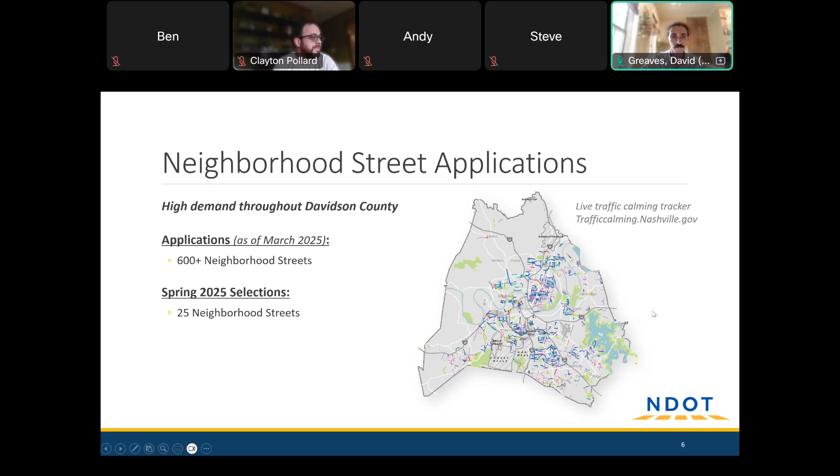So there are a few things that the traffic calming program does as part of these projects, but there are a lot of other things that NDOT can do, or certainly Metro Nashville as a whole. So if we run into anything in this meeting that maybe we're not able to handle with this project, we want to make sure everyone is aware of Hub Nashville as a resource to report all sorts of things.

So it's a good place for sidewalk requests. Maybe some signage is broken or run down. Really anything from a pothole or a clogged storm drain all the way up to a request for a new signal can go through Hub.

Okay, so about the prioritization formula, or how Ben Allen got selected for traffic calming. We basically put together a weighted score based on 5 factors. Those are vehicular speeds, volume, crash history, non-driver accommodations, and trip destinations. Now you'll notice that vehicle speeds and volume, which is how many vehicles drove on the street, make up the vast majority of the score.

And the logic behind that is between the amount of cars driving on a road and how fast they're going, that's a pretty good proxy for the risk that is posed to anyone who might be using the street. We also do consider crash history because if there have been any vulnerable road user crashes in the last 10 years, that's a good indicator that there's a problem that should be solved.

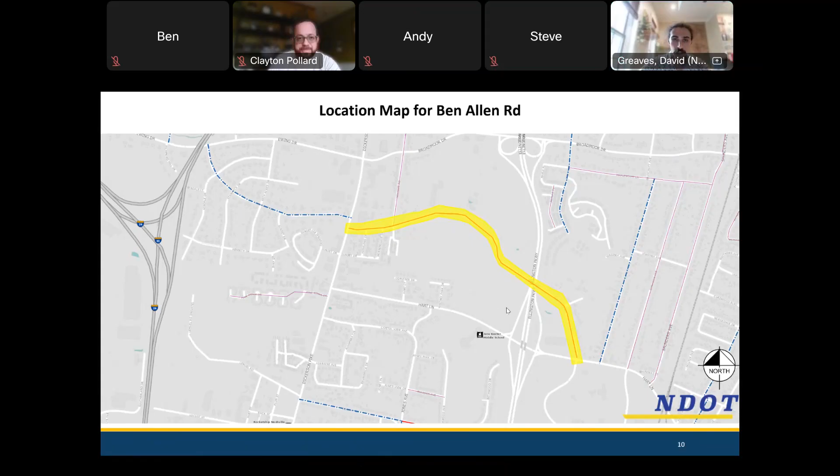All right. So if anyone is familiar with the traffic calming program, they'll know that a pretty good portion of our designs include what's called speed cushions. We use these often because they're an example of that kind of physical measure to pursue slower speeds. So unlike somebody writing tickets or speed limit signage, these actually physically affect a vehicle as they're traveling over them. They work like speed bumps, but they're stretched way out to achieve a higher target speed. So something in between 20 and 25 miles an hour is thought to be the ideal speed that these are designed to produce.

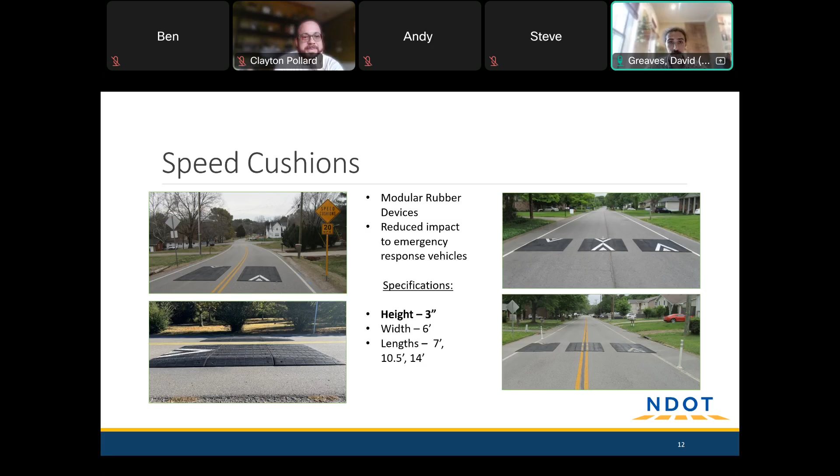And the reason that they have gaps in between them is to provide a reduced impact to emergency response vehicles. They're about 3 inches high, they're 6 feet wide, and they come in a variety of lengths, 7 to 14 feet. Similar to these are speed tables. These are made out of the same materials, just in a different arrangement. And the main difference here is they lack those gaps. So they do not have the same kind of reduced impact to larger fire trucks, ambulances, but they do stretch all the way across the road.

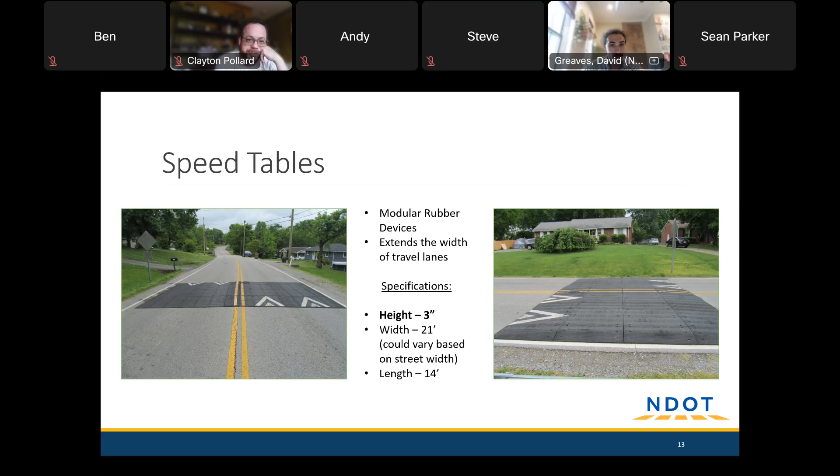We tend not to use these very often. We'll sometimes pull them out in a situation where maybe the width of the street is kind of an odd number, so we can't really fit the right amount of cushions in there, but we do use these somewhat sparingly.

Now, the reason that we use these so often in the traffic calming program is because they've been demonstrated to work pretty well. So what we're looking at here are the results of a study conducted in March of 2023, where 6 projects were measured and observed. And before those projects, the average speed on the streets was 31 miles an hour, and afterwards it was 22. And then the 85th percentile speed that we mentioned earlier came down all the way from 37 miles an hour

to 25. So the hope would be on a street like Ben Allen, if we were to install vertical measures, we would see a similar degree of lowering, taking that 85th percentile speed down from 40 to somewhere much closer to the speed limit and a safe speed to share the road with pedestrians and cyclists, really whoever is there.

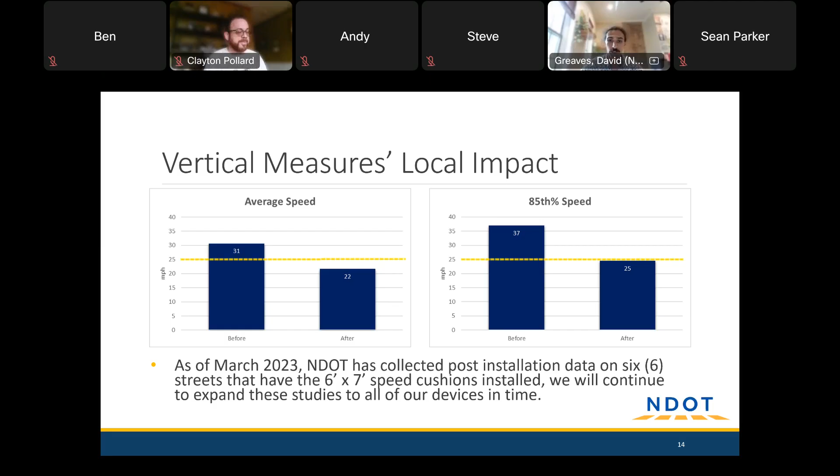There are plenty of places and reasons why vertical measures may not work in a particular place or on a particular street. Maybe a hill is too steep for vertical measures to work well, or we don't put them on blind curves because we never want to surprise anyone with a speed cushion. In those circumstances, we'll sometimes use radar feedback signs to fill in the gaps where cushion spacing isn't quite as ideal as we'd like. These do have some impact. On their own it's not a whole lot, but it helps remind people what the speed limit is and how fast they're going, and to please slow down if they're speeding. So these can be a helpful tool.

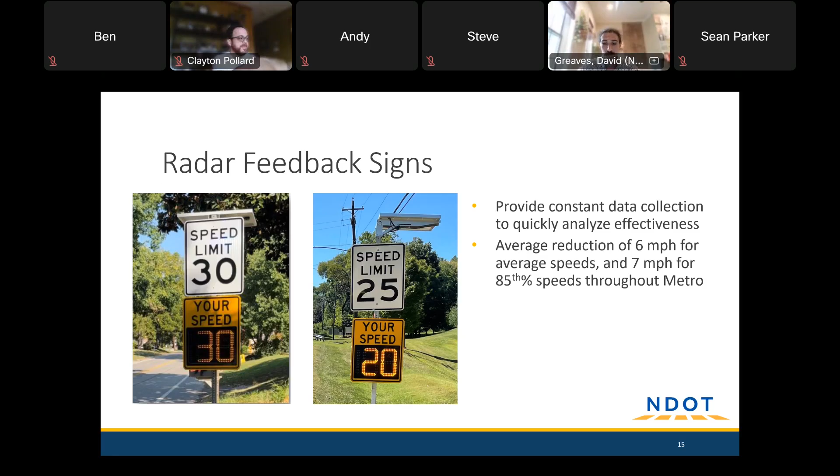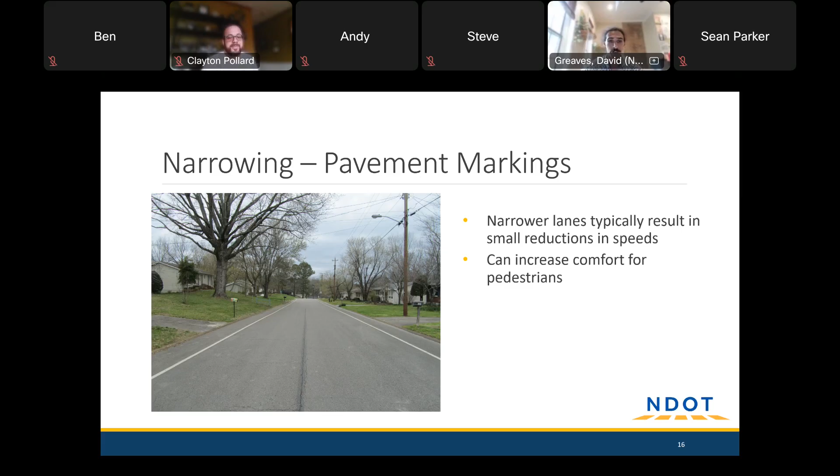We can also do something called narrowing with the use of white edge lines. On roads that are much wider than necessary to move the cars, that width can induce speeding by giving people more room to feel comfortable going fast. We know that driving over a narrow bridge with walls on either side, we'd go a different speed than on the interstate with wide open space. This psychologically nudges a street's design toward the bridge side of things, even though it's just paint on the road and isn't physically affecting cars. It can increase pedestrian comfort, since walking along the road you might feel better knowing there's a line clearly marking where you're supposed to be versus where a vehicle is supposed to be. That's an added advantage of this strategy.

On wide sections of street, we can do something called chicanes. This is where we take the center line of a road and zigzag it back and forth along the length. Similar to bulb outs, this slows speeds just by forcing vehicles to use their steering wheel and maneuver a bit—it's not so much a straightaway as it maybe once was. The only downside is it doesn't work everywhere, since most streets aren't wide enough to zigzag back and forth, and it can reduce the amount of on-street parking available, since we wouldn't want people parking in the spot where the lanes are shoved to one side.

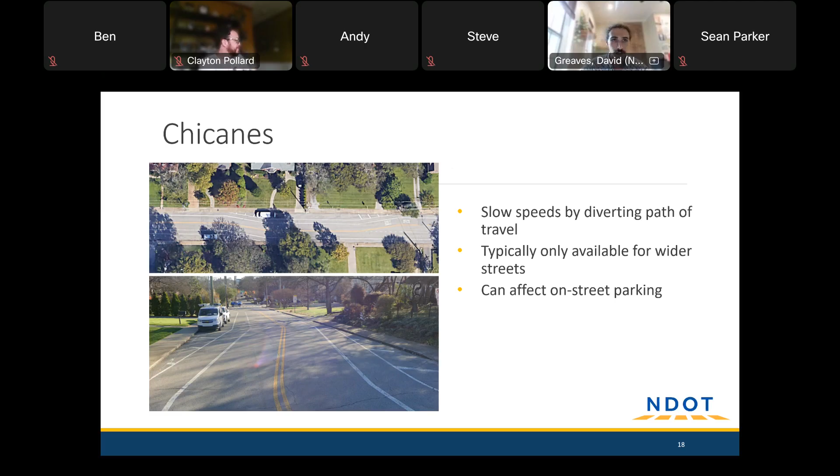And then lastly, on really large intersections, we're sometimes able to do traffic circles. These work like bulb outs, but narrowing from the inside out instead of the outside in. They work similar to a roundabout, but essentially just asking everyone to start by doing a right turn and then go around the circle and either go straight, or if you're going left, go counterclockwise around it to make that left turn.

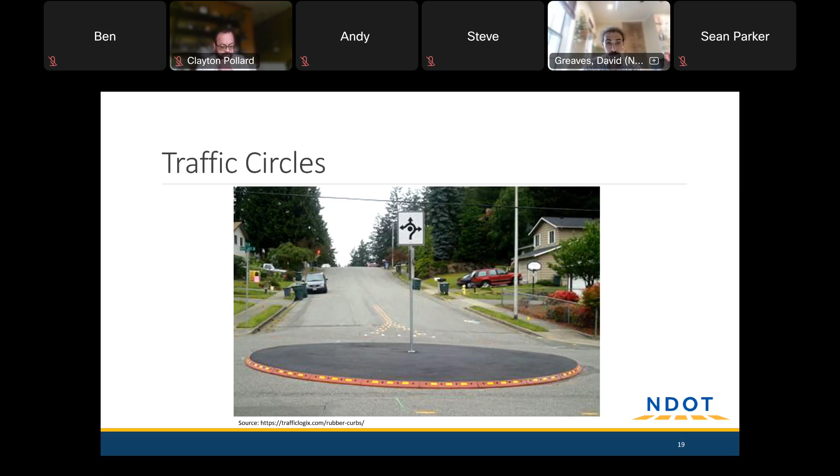So those are all the tools. Next, we've got the preliminary concept that we've drafted up. I've showed that on the screen, but I want to pause again to see if anyone had questions about anything I've covered. If not, I'll walk you through what we're looking at here and what we had in mind when thinking about what type of design could work for Ben Allen. But anyway, wanted to pause for questions.

Sounds like I can go ahead and dive in. Feel free to stop me at any point if you've got a question.

But so moving from Dickerson in the west direction to the east, we've got one set of speed cushions just past Highland Drive. That is about halfway between Dickerson and Hillside Road. Hillside Road has got a little bit wide of turning radii, so we've proposed a couple of bulb outs to potentially tighten that up. Would love to hear any feedback about those, or we can go back to that slide if anyone's curious about exactly what that consists of.

Continuing east, we have another set of speed cushions at the bottom of a relatively steep hill. We think that may be where people are tending to pick up some speed. And then you'll notice a fairly large gap in between this cushion and the next. That's because on that steep hill, it's steeper than we're able to put vertical measures in without exceeding the threshold that designers are really asked to stay within.

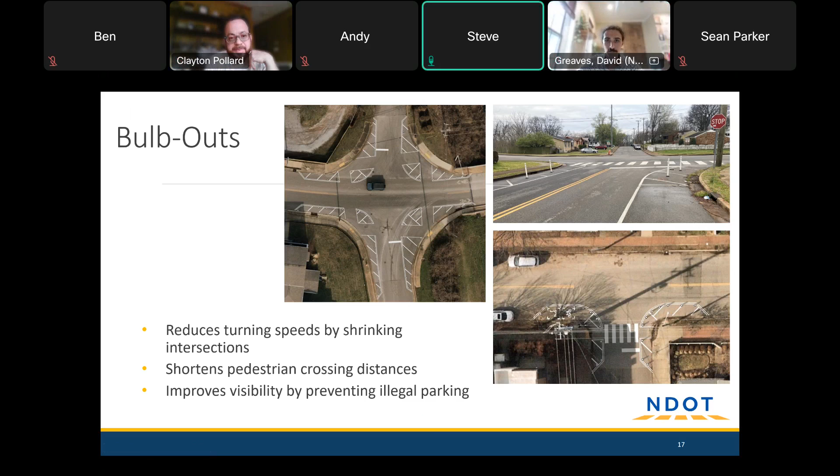I've got one more kind of unrelated question, but I'm curious, with all the apartments going in up the road, do you propose that there's future plans for putting in a sidewalk or potentially extending the very small amount of sidewalk that we have existing? That's a great question. I don't know about plans for sidewalk extension. Sometimes developments are asked to build portions of sidewalk as part of a rezoning, or something like that. But that's all pretty contingent on the specific plan for a development. In terms of a city-led project, there's not one that I know of right now. But it is something that can be requested on Hub, kind of make it known that there's a need for one, and then we may be able to build one a little further down the line.

I will say that the two kinds of projects are pretty different. Traffic calming is mostly quick build materials in the street. Sidewalks are a little more involved since they sometimes involve buying property and altering drainage patterns, things like that. Okay. Thank you. Sure.

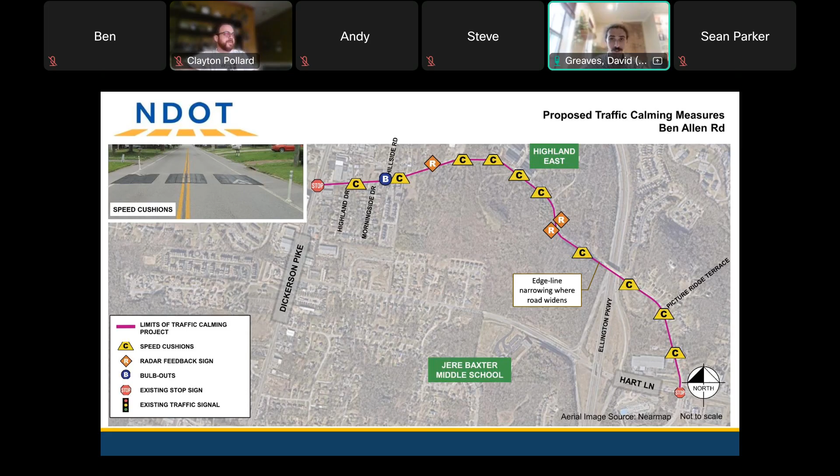Great. Well, we can move on to talk about the next steps, and we'll also have plenty of time for questions at the end as well. So if you think of anything, we can come back to any of these slides. What we're looking at here is a flowchart of the program. As we mentioned, this started with an application from residents in the neighborhood. We then went through the data collection prioritization process where Ben Allen was selected. And we're here at the red circle, the first neighborhood meeting, where we present our draft design, collect input from you all, and really get a feel for what this neighborhood is looking for in a traffic calming project. The next step is design.

So what we need to do is a site visit to make sure we fully understand the grades, the widths, any other factors that might help us provide an informed design for the street, and then ultimately draw up construction plans that we'll be able to give to a contractor to have them build the project. Once that's done, we can do one of two things. We can schedule a second neighborhood meeting where we review the construction plans that we've drafted, make sure that any changes, things that we've discussed tonight, are acted upon. Or we can post the plans online and proceed with the online ballot, basically skipping the second neighborhood meeting to speed up the implementation process a little bit.

Once a ballot is done, and if 2/3 of respondents vote yes, the project will be entered into the construction queue, which is around 8 to 10 months. But that's kind of a range of time. Just wanted to set expectations that there is a line of traffic calming projects waiting to be built, and you'll be added to the end of that. A little bit about the balloting. Actually, I'm going to go back. Does anyone feel strongly one way or another? Do we want to have a second meeting or do the online ballot a little earlier? We're really fine doing either. So anyone's opinion is welcome here.

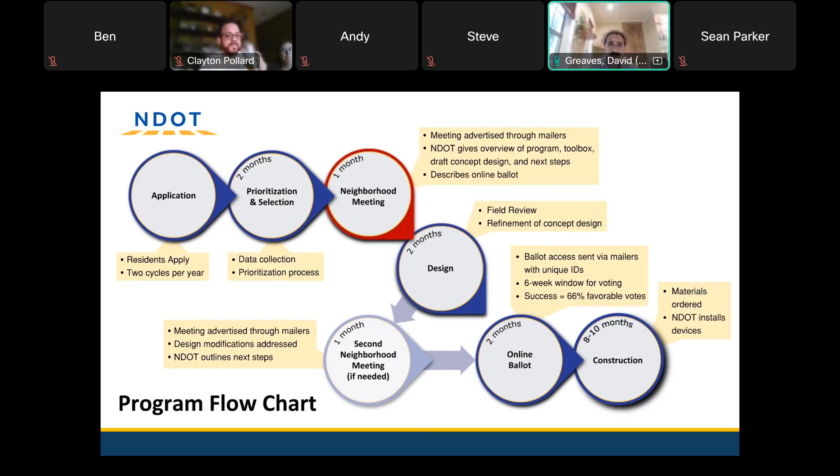Okay, great. I just need to know if I need to start going out and canvassing to all my neighbors, be like, vote yes. That's what I was thinking too, right? No, we've had plenty of neighborhoods that have chosen to do that, and with generally pretty good results. I guess to that end, I'll skip ahead just a little bit. This is the list of property owners that were sent the invitation to this meeting and will be sent the balloting card.

So what it is: any owner of a parcel that is residential, a church, a school. If it's an operating business, I don't remember exactly what's over here on Dickerson, but like an auto mechanic would not be balloted here. Just kind of the residents of the street. And then vacant properties, so if there's no buildings or anything on it, those are ineligible as well. We also take out duplicates. So if you have 10 properties, you only get one vote. You don't get 10.

But anyway, we can send this list out to y'all if you're interested in reaching out to people, like which neighbors to canvass. That would be fine, if that's something that you want to do. Yeah, I'd be interested in that. Great. I will make a note of that. And we'll do that after the second meeting, so we don't need to get into it too much now. But yep, perfect. Cool. Well, all the balloting stuff we'll cover in more detail in meeting number 2. If anyone has questions, I'm happy to speak to them, but it'll be a little more relevant once we're getting closer to that point in time.